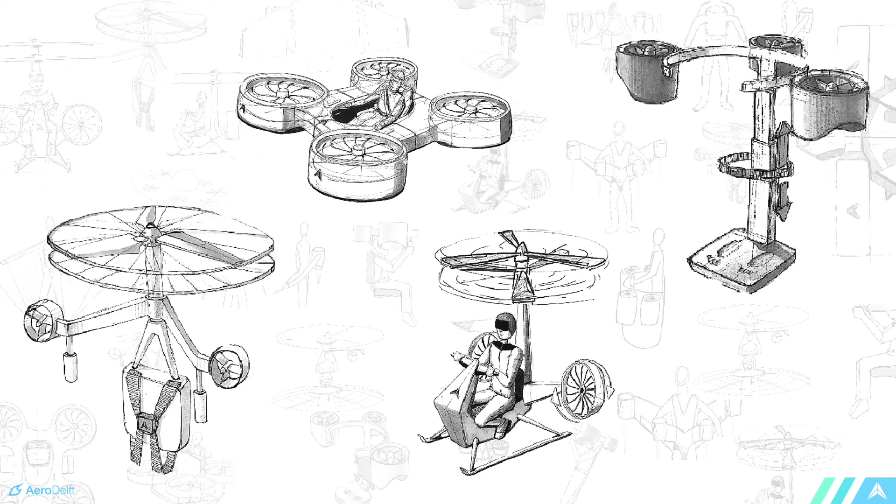When we started this project, we had a bunch of ideas, and we can imagine a future for each and every one of them. All of them have their own potentials and their downfalls, but a future for each and every one of them is possible. But naturally, we had to pick just one. Ladies and gentlemen, I present to you the Hermes One.

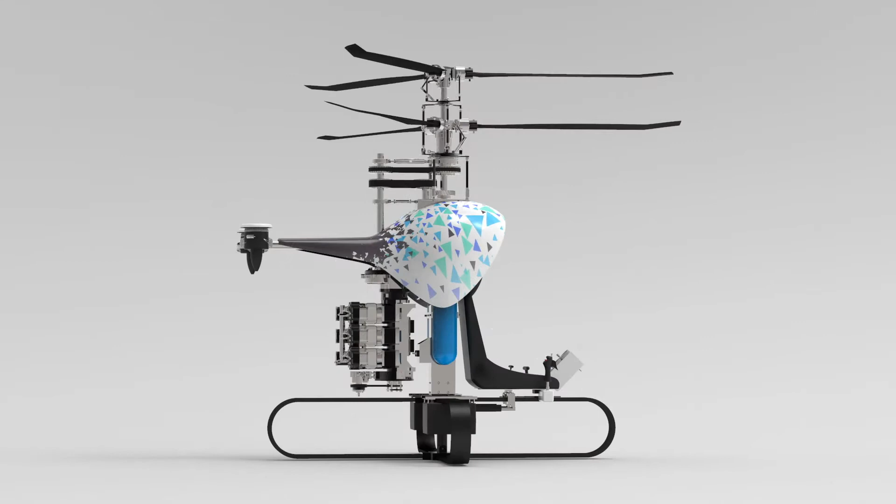Well, after all the hard work, it's so rewarding to see it all come together. It's really unbelievable the amount of progress we've been able to make in just 5 months without a single full-time student in the team, at least on paper. I'm David, the Chief Engineer of Project Talaria, and you're all here to meet the Hermes One. So I'm going to do just that. I'm going to present the device and all its subsystems to you.

Talaria's vision for the future of air mobility begins with a quiet, intuitive, personal flying device called the Hermes One. Here are some of the features that you can expect from this device. The first is 30 minutes of flight time. Why 30 minutes? Because that's usually what people are willing to put into their daily commutes. And that's the upper bound that we want to set on a commute for everyday transportation.

Next, we want 40 kilometers of travel distance. 40 kilometers is an upper bound for the average urban radius of the largest cities in the world. We want the device to be vertical takeoff and landing, carry a 90-kilogram passenger, be low noise, and aside from all these tangible requirements, we wanted a device safe enough to be used by everyone, that could be certifiable in a given timeline, and that could offer the experience of open-air flight.

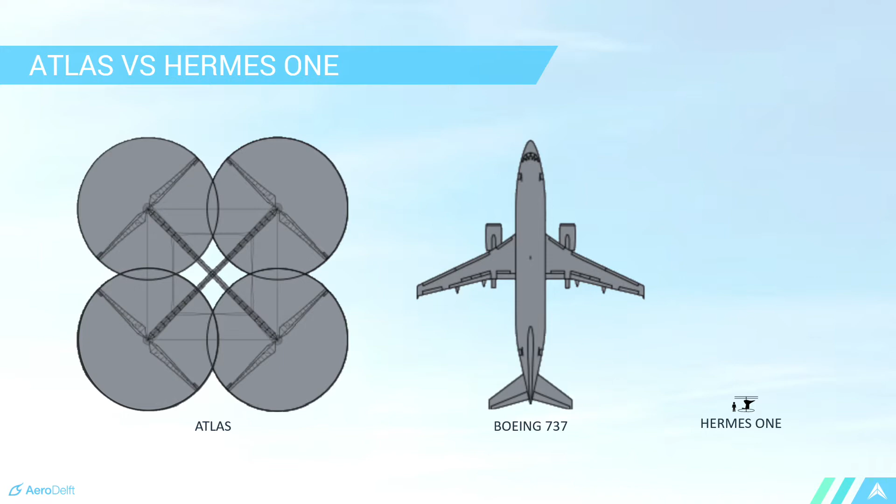It's a human-powered helicopter. You might ask, why is it so big? And the answer is simple. It's human-powered, so it needs to be incredibly efficient. By pushing itself off from a very large chunk of atmosphere, the rotors can spin at very low rates, and its power requirements go down by a lot.

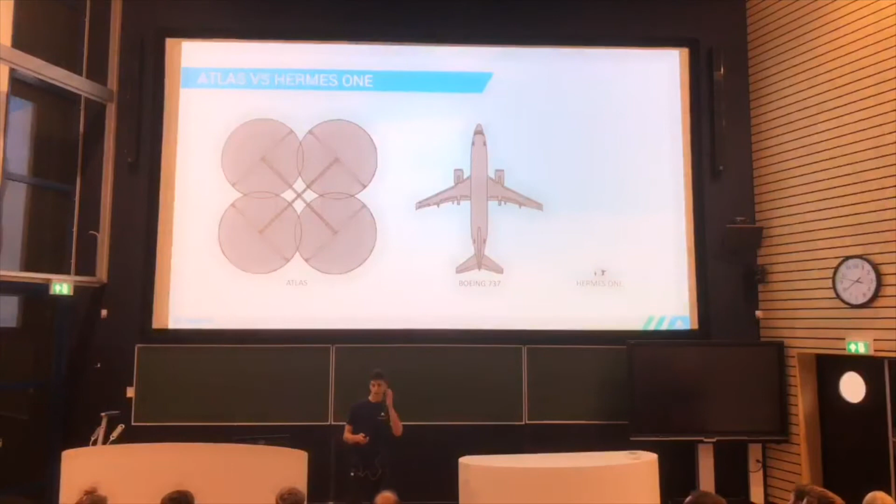So if we compare the size of our device with the Atlas in numbers, we see that our device is 2.6 meters in maximum dimension, while the Atlas is 46 meters. And this has direct consequences on things like disk loading, which is the amount of kilograms that each square meter of the disk has to hold.

And Talaria, for instance, has to lift 16 times more weight per square meter of each rotor. And this has direct consequences on the power requirements, as we use something like 100 times more than the Atlas. The Atlas device was clearly designed for one purpose, and that was efficiency. But it's not really functional.

I mean, it's quite hard to imagine something like this landing on a rooftop, something the size of a Boeing 737. And even if it did, in the same area, you could land 235 Hermes Ones. So you can see that for applications like ride-sharing, where instead of picking up an OV bike at a station, you pick up a Hermes One at the rooftops, it's really beneficial to be ultra-compact.

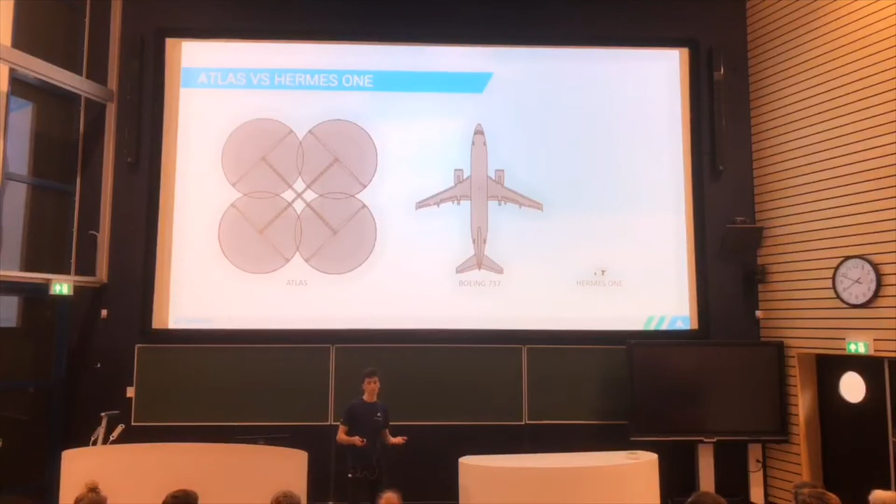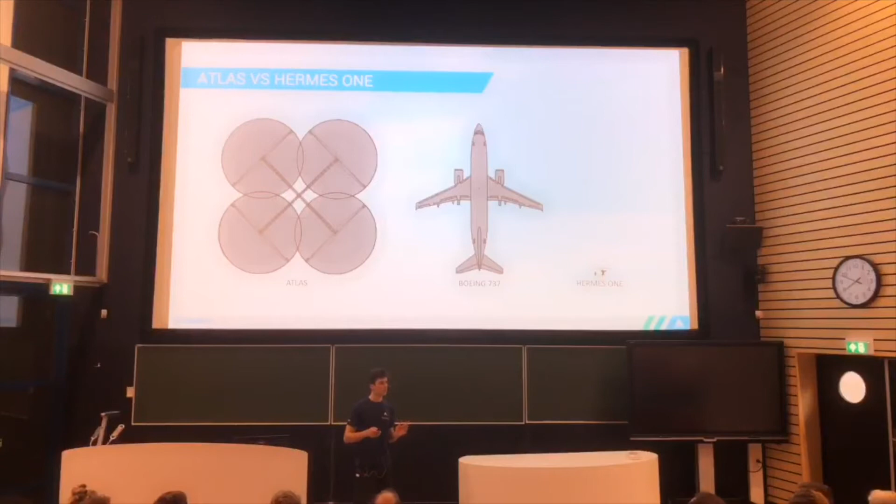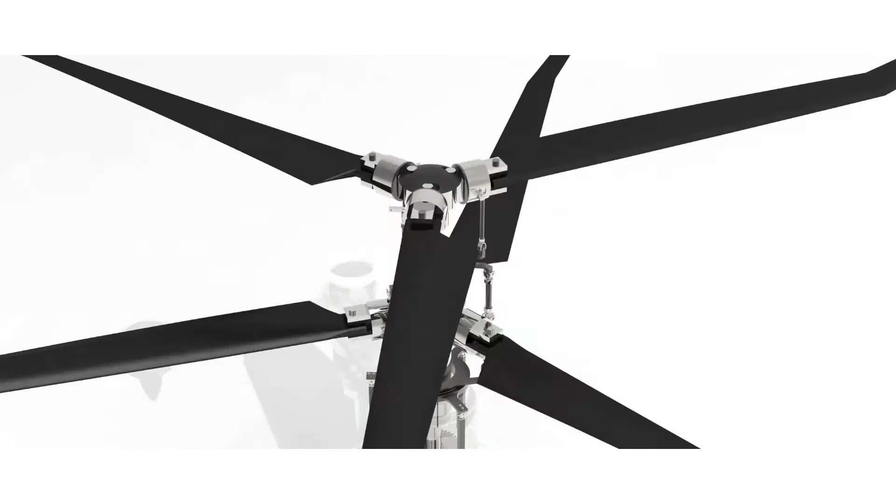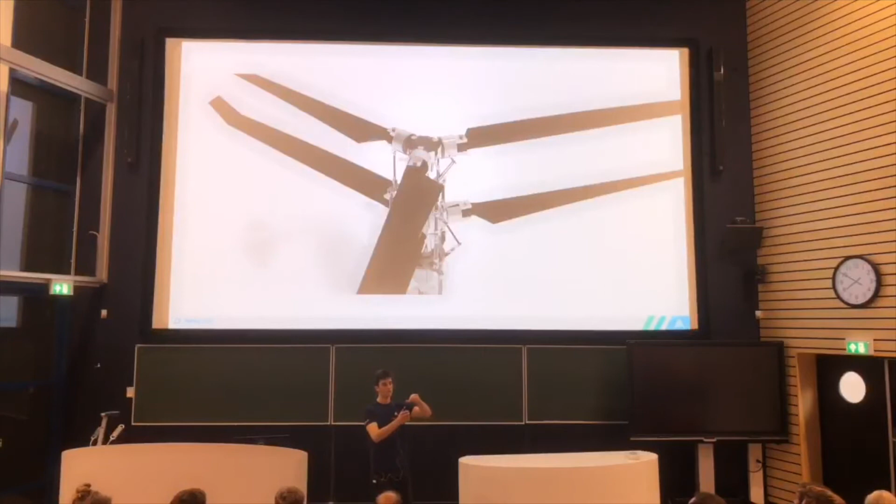The first is a higher efficiency for the same area. So by stacking two rotors on top of each other, you can produce almost twice the lift for the same amount of area. The second one is that there's no net torque on the main structure. So if you're familiar with conventional helicopters, you'll have noticed that they all have this very recognizable tail. And what the tail is doing is it's counteracting the moment that the rotors exert on the main structure. But with a coaxial, you have two rotors spinning in the opposite direction, and their torques cancel, so you can remove a tail.

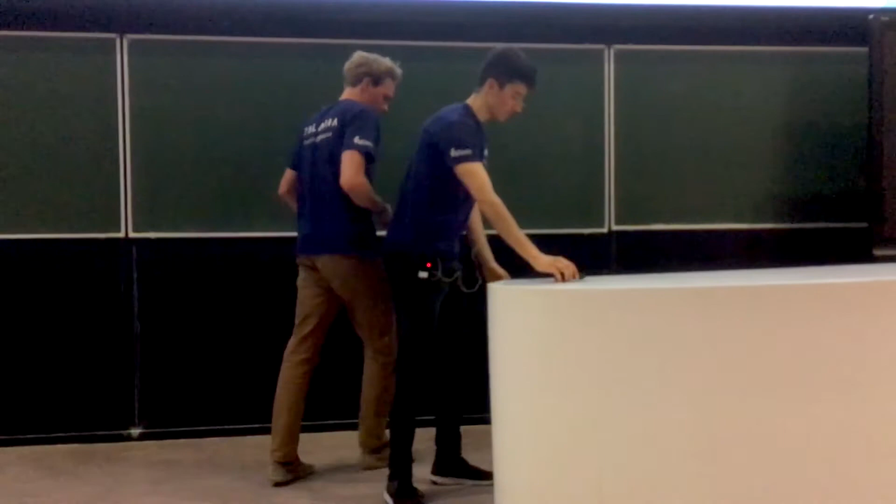The last advantage is a bit more difficult and unintuitive to grasp, which is why I wanted to do a demonstration of it. And I'd like to ask Philip to help me out with it. It's about gyroscopic precession, which is something that is a very big problem in single rotor helicopters, but is completely eliminated in coaxial systems. So what we're going to do now is spin this wheel, which you should imagine as a rotor for now.

And what we create then is an angular momentum on the system, which can be expressed as a vector pointing in this direction. And I'm going to hold it with this rope here. And what the system wants to do is just fall down. So there's a torque which is pointing in that direction. And so what the system wants to do is something very unintuitive, which I can show you right now. So you see that the angular momentum vector is following the torque vector. The angular momentum vector is pointing in this direction, and the torque points in that direction, and it's just continuously following it. It doesn't fall down.

So how does this translate to a helicopter, for instance? I'll try to give you a clearer view of how it works. So it's finished. Okay. So now we have the rotor here, and I'm going to pull on this rope, and what you expect is that the disc tilts towards me, but what it does is it actually tilts towards Philip. So I can show you again what happens. In case you missed it the first time, I'm pulling on this, you expect it to move this way, but because of gyroscopic precession, there's a 90-degree shift. And it does something completely unintuitive.

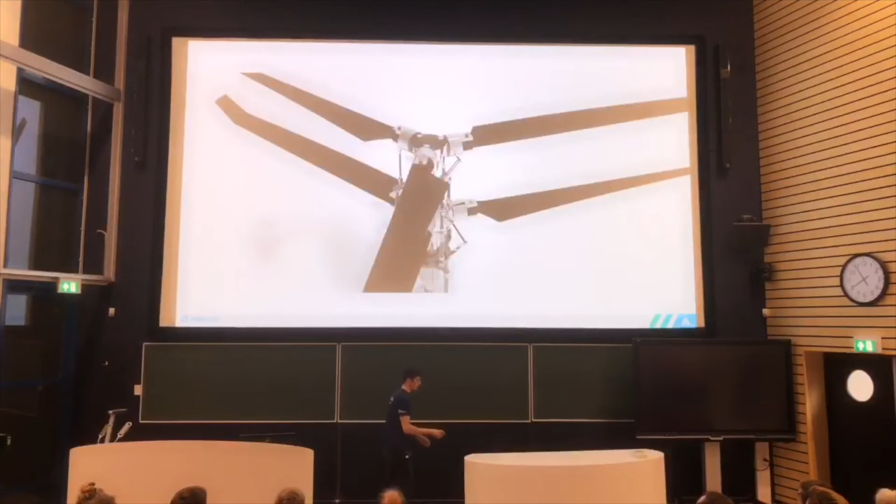So another crucial system that I wanted to mention about the rotor system is that it's actually a crucial safety measure for our device. It relies on auto-rotation, which is a very fancy name for a very simple concept that I can demonstrate to you using a simple piece of paper. So if I just drop this, oh, sorry, didn't work very well. Yeah, so you see that it's converting its potential energy into rotational energy and slowing down in the process.

And in the Hermes One, this is supposed to work in the same way, except that before touchdown, we can actually increase the angle of the blades and get an extra push to have a soft landing. So another very important aspect of the design, I'm just going to skip a slide, is that it has to be quiet. Helicopters and flying machines in general have been notoriously known for being very, very noisy.

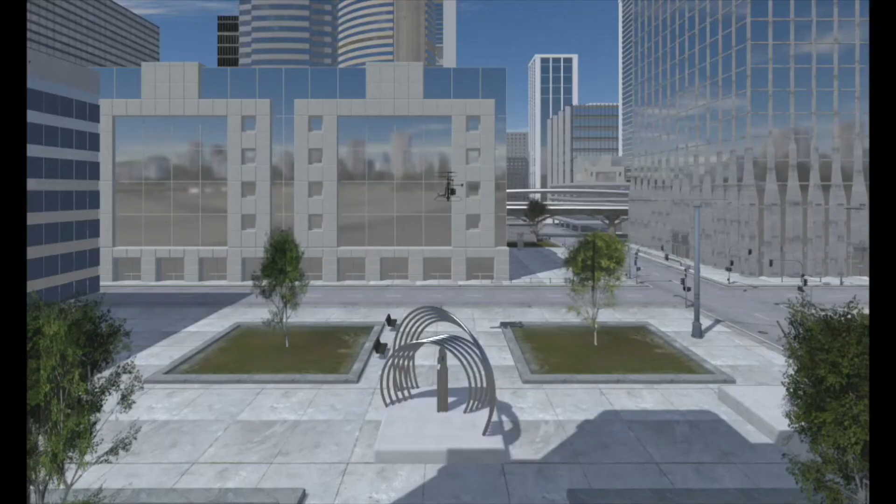And a huge effort has gone into limiting their use around urban areas by moving airports to the outskirts of cities and restricting low-altitude airspace for use of these devices. But in personal air mobility, we want to move these devices to the urban areas, into our lives. So acoustic optimization becomes a real big issue to solve.

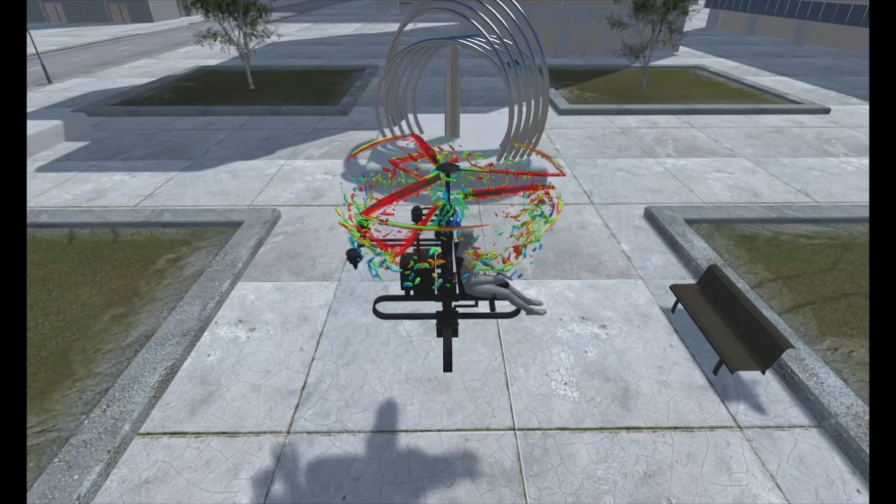So what you see here are not just pretty colors. This is actually a very high fidelity simulation of the flow around them. And this simulation has allowed us to get very accurate estimates of the noise produced by the device. And what you see here are the pressure fluctuations at very, very low RPMs, because otherwise they're just not visible.

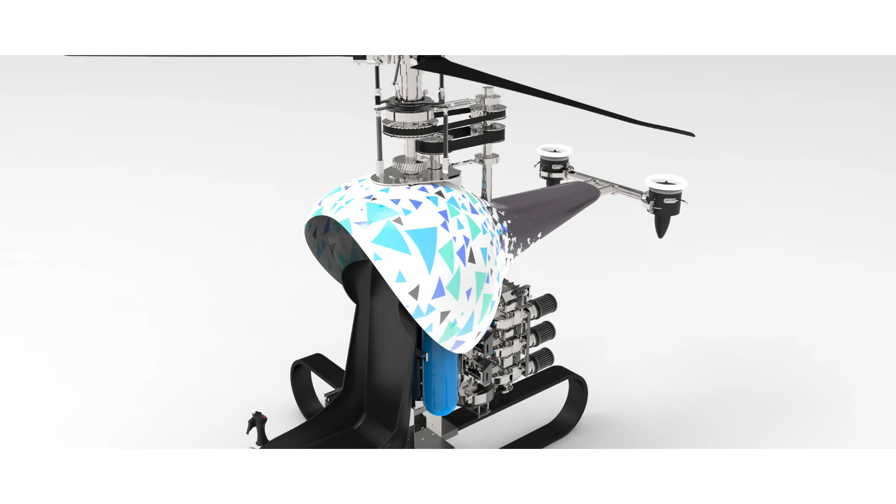So the next question is, where does all this power come from? It actually comes from the powertrain system. The powerhouse of this device is a propeller aircraft engine, and it was chosen because it has much higher energy and power density capabilities than current electric systems, and to be able to meet our 30-minute endurance requirements and our power requirements, it was almost one of the only options.

However, I must say that the team is currently looking at the new advents in electric technologies and is trying to make this device as efficient as possible so that zero-emission technology can be implemented in the very near future.

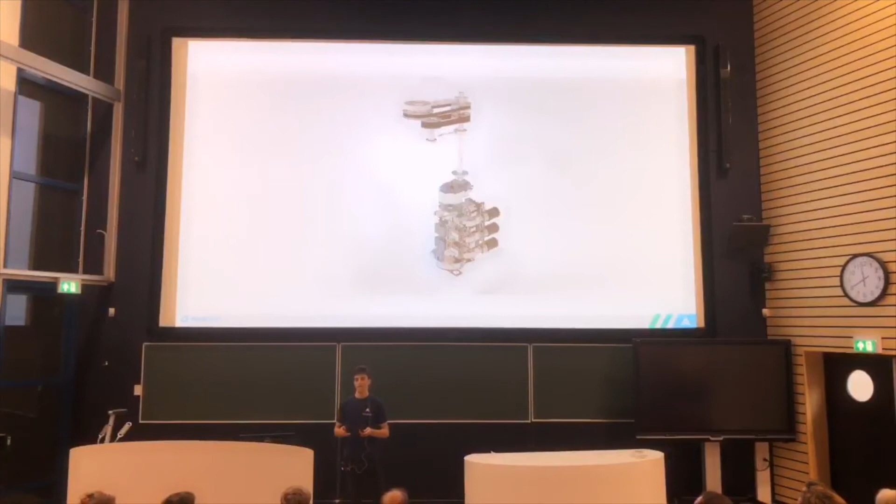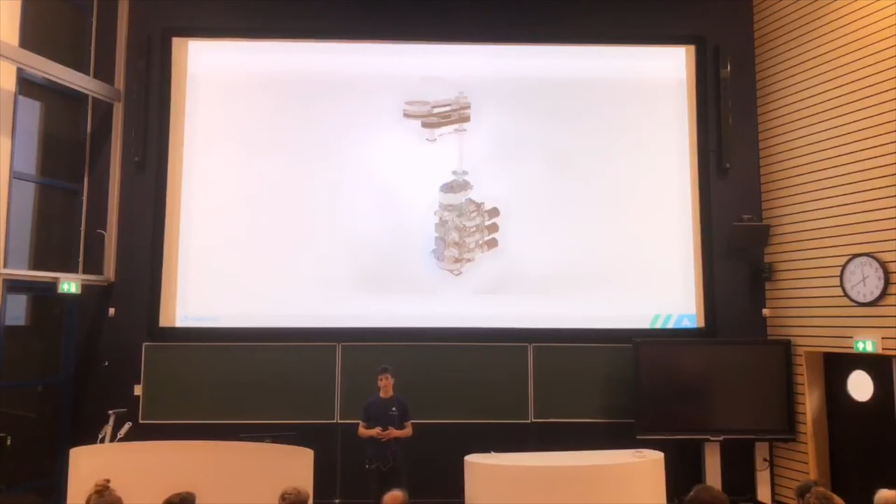So now, how is this power from the engine, which is capable of powering 187 households in the Netherlands, transferred to the rotors? Well, it's done through timing belts. The adjustable tension in these belts allows us to make sure that they're always operating at peak conditions, and they have many advantages over other transmissions, such as being more lightweight, requiring less maintenance, being way more reliable, and also being less noisy, because the meshing is between rubber parts.

Now, the next big system of the device is the skeleton, of course. The skeleton is responsible for holding all the other systems together while being as lightweight as possible. The highlight of the skeleton is really the landing gear. Why? Because it's also a very important safety system. It uses the 4 C's that you can see, which are basically sandwich panels with carbon fiber on the outside and honeycomb on the inside.

And this is inspired by Blade Runner designs, which use very similar physics to their advantage. In this case, they have to absorb the energy of the impact of each footstep of the runner so that they don't feel the impact on their limbs and get injured. Instead it stores that energy in the material by creating a deflection.

So this ability combined with a dampening system really allows us to have a landing gear that can absorb a huge amount of energy. So much, in fact, that even on landings of 12 Gs, we can reduce the number of Gs to 3, which is what the pilot would feel.

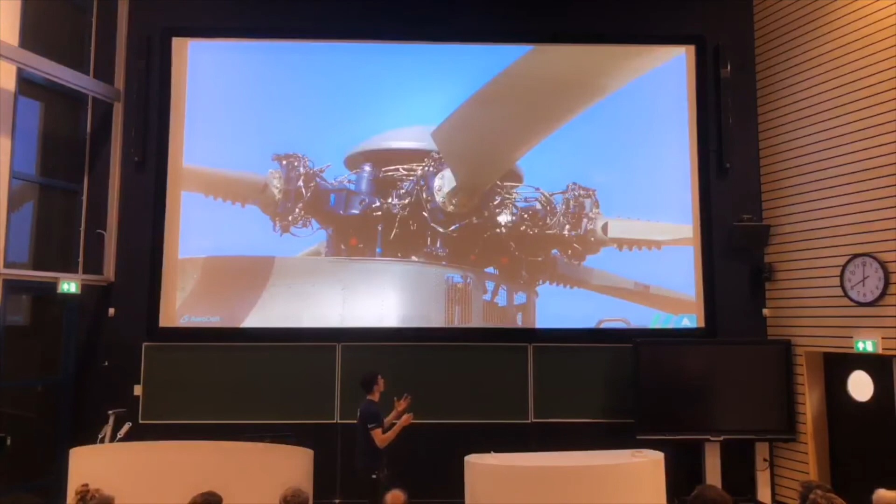So the next aspect to talk about are control systems, of course. Rotorcraft are well known for being very hard to control. And in conventional helicopters, all the controls are bundled together in the rotor hub. This makes them incredibly complex and introduces many single points of failure.

Moreover, they also rely on many pilot inputs. So a pilot of a helicopter has to use all 4 limbs to control the device. And you can imagine how much training that requires. So in our quest to design a device to be used by everyone, we obviously wanted to simplify these controls and make them easy to use so that anyone can really fly this device without any training.

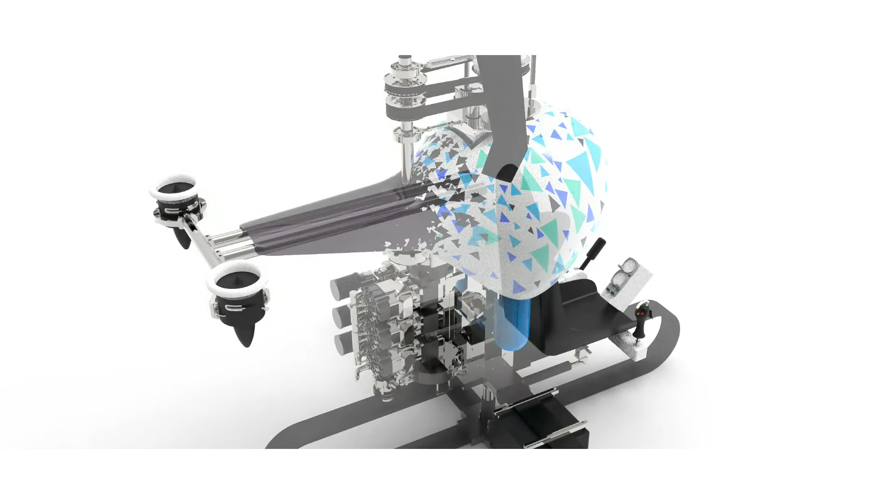So due to the experimental nature of the control systems that we've been working on, we've been designing 2 interchangeable control systems which we can easily swap out, and we're going to be testing simultaneously. The first one is the ducted fan control system. This basically relies on 2 electric ducted fans at the back, which are able to tilt to produce all the attitude control that we need.

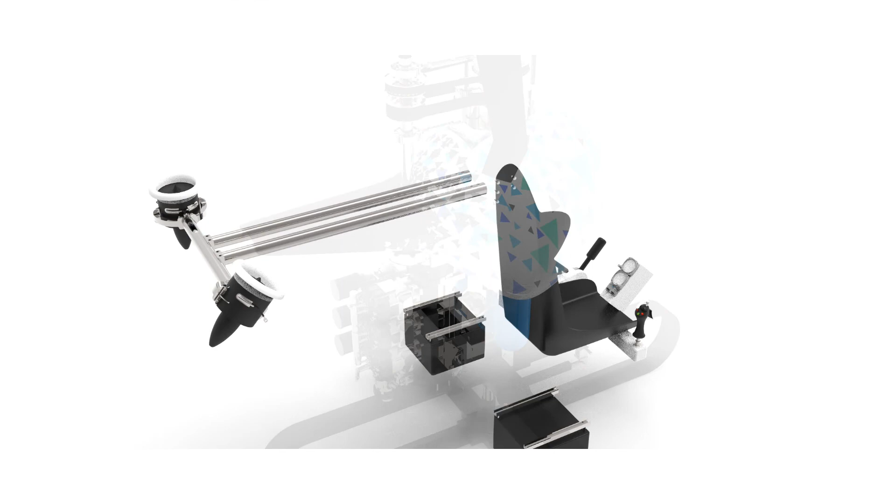So if you're in hover, for instance, and you need to roll, then it's as easy as just doing that. You create a force couple and you get a roll moment. If you need a yawing moment, you do something very similar. And the last rotation that you saw is the actual speed that they can rotate at. So this shows how fast reaction times with this system can be. So if there's a wind gust or something, this system can react automatically and very quickly.

So this system has actually been tested, or the concept has been tested by companies like Lilium as well, which have integrated tiltable fans in their design. And they've tested it in a semi-autonomous device, which shows that there's a lot of potential for having active control systems that require really no piloting skills.

And the last thing to mention about this device is that it's fail-safe. So if there's any problems with any of the fans, the pilot can just turn them off and he'll immediately go back to hover due to aerodynamic moments, even if he's in forward flight.

Now, the second control system is one we're really, really excited about. So we thought, okay, the pilot is about 1/3 of the mass of the vehicle. Surely we can use his CG to do something useful, right? Like, if you go on a bike and you have to take a turn, you probably don't notice it, but you're using your center of mass to help in the maneuver.

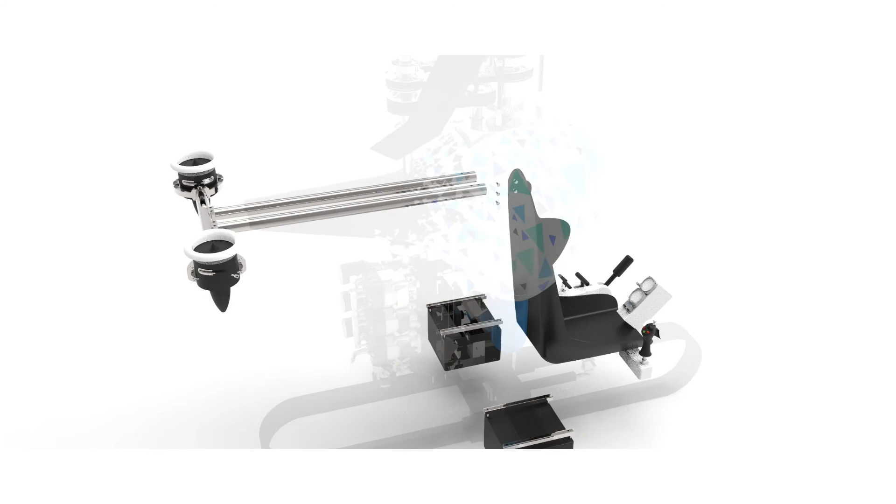So what we're going to do now is we're just going to remove the side fans and the batteries with them, and then we're going to put a control surface in place instead of the side fans. So what we're going to do now is shift the seat of the pilot and get rolling and pitching moments from that, and a yawing moment from the control surface at the back, which basically uses the downwash from the rotors to produce a force which can yaw the vehicle.

And we've shown, according to our calculations, that a shift of just 10 centimeters of the seat of the pilot is enough to propel us to the forward speeds we need. So this has a lot of potential because it's a very elegant system. It's very exciting to fly, we think, and very intuitive as well. So that is really the goal, to build an intuitive, inherently stable, high performance and quiet device. You can call it a flying Segway.

Aside from facing all these technical challenges, we've also been facing many logistical ones. We've made sure that every nut, washer, bolt, or any other component in the device is either manufacturable by us or directly purchasable. And this is crucial because we have very ambitious timelines, which we're ready to meet. So we're not relying on a magical technology or something to take off the ground. We're really ready to fly in a few months. So this is the future that we envision, and this is the Hermes One. Thank you very much.

Thank you, David, for showing us the engineering components of the device. So in the past 6 months, we have come so far from a bunch of loose ideas to hopefully starting our building phase next week and definitely throughout the summer. It's also our plan to have our first test flights at the end of this year, and in 2019, our first manned flight.

We're looking into, as David said, the sustainable alternatives for our propulsion system, and we're keeping track of how the technology in the electric propulsion field develops. And we intend to improve on it as we go and as technology goes with it.